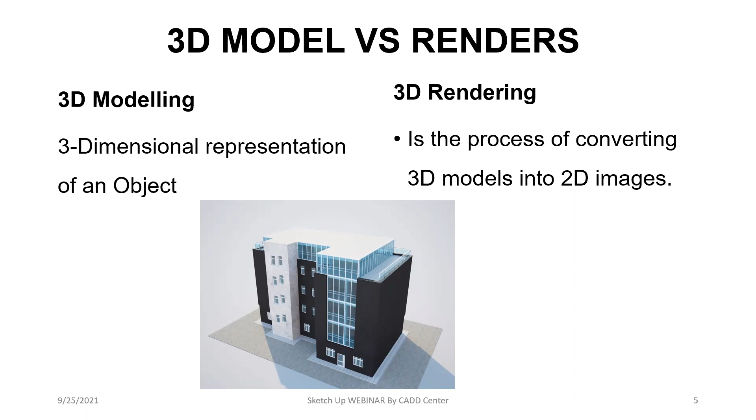That's why here I didn't put 3D model then 3D render separately, because even if I put a 3D model, it would become a photo, so it would be a render, unless I've taken a screenshot. So that is the difference. Now we can move on.

So now we're looking at what SketchUp can produce. These are some examples. This webinar is mostly going to concentrate on architectural drawings, but SketchUp can also do mechanical, electrical, or any kind of product design, though the webinar focuses more on the architectural side.

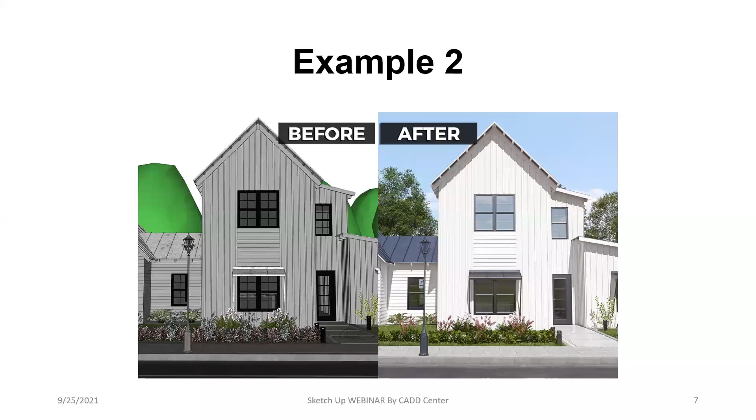Another example is this. We have before you render, you can see how the house is looking, then after rendering, this is how the final drawing looks. So that is the difference between the 3D model and the 3D rendering, or the 3D render. On the side, you can see it's more impressive, like a photo.

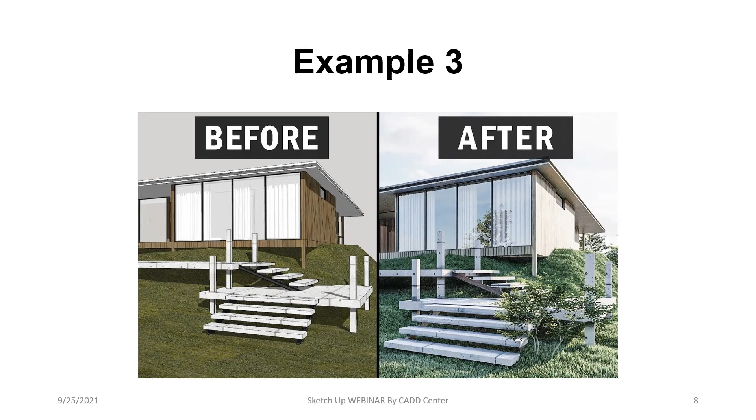Okay, so now we're going to look at how do you get SketchUp. There are different products, or versions, of SketchUp.

One, there's a free version, and it's only accessible through a web browser. All you need to do is visit the SketchUp Pro website, sign up if you don't have an account, or sign in, then you can start using SketchUp from there, through a web browser like Google Chrome, Edge, Safari, any browser. That one you don't need to pay for, but it has limited features. They're enough for a beginner, or enough for learning, so you don't need to spend a lot of money on software you're not commercially using.

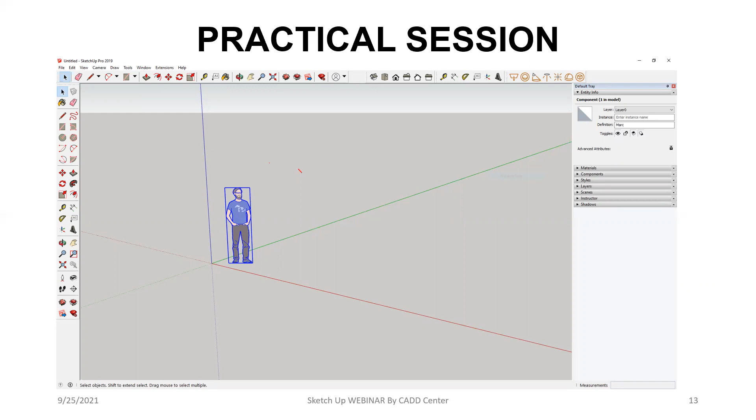Maybe you have any question about the presentation, from what I've presented before we go into a practical session? Anyone with a question? Okay, if there is no question, you can always send it in the chat. If there is no question, we can continue with our practical demonstration.

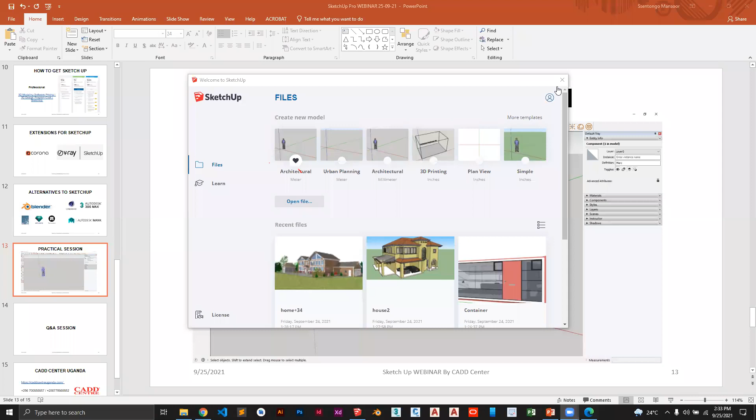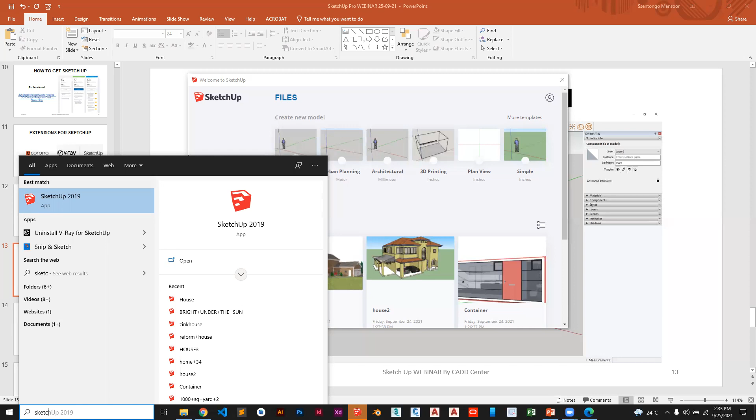So I've opened SketchUp, it's already installed on my computer. Here you can see the icon down here, that is its logo. You can either click on that in case you pinned it, or you can search for it. It is called SketchUp, I have version 2019. There are recent versions, but I'm using 2019 due to certain reasons, that the new versions tend to have problems and they tend to crash.

So every time you open it, it will give you this interface, and it has what they call templates. So when we're creating something, any drawing that we need to do in SketchUp, it starts with a template. It's not that it comes with already something in there, but there are certain settings that are done already for you. When you go through, there is architectural, urban planning, 3D printing, plan view, simple, but then the recent files - these are recent files that I've worked on.

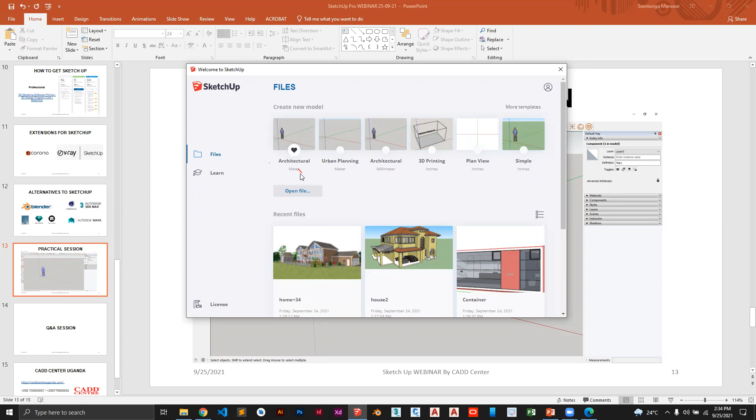Now, where you have to begin is the units here. So if it has architectural and meter, it means it's going to open for you a 3D space where you have X, Y, and Z, and the units will be in meters. Then urban planning will open according to urban planners - they have more dimensions compared to architecture, but the units will still be in meters.

Then it can also open architectural, but in millimeters. They can also do 3D printing, but that one in inches. Now, if you're going to create a 2-dimension, you need to start with a plan view template. So for me, I'm going to start with the architectural, and let me just go with meters.

Yeah, so we have SketchUp. Can you see the screen? Can you see the screen? Yes, we can. So the template will always just come with a certain model, like a person - this is just inbuilt, it comes with it.

As usual, you start by saving, you save your project, and SketchUp has an extension of .skp. So I'm going to save it here in desktop. Let me call it a practical demonstration.

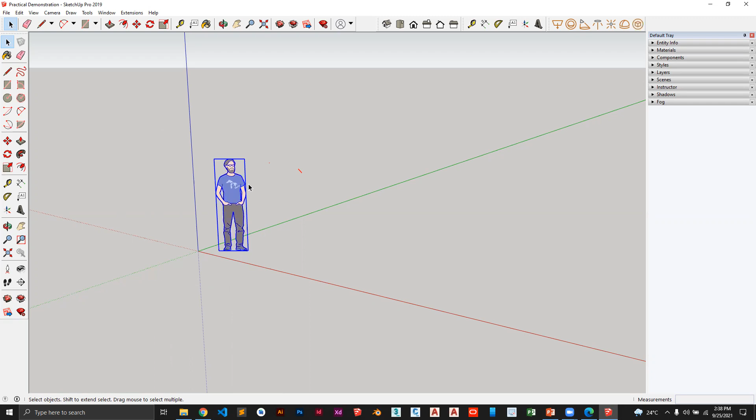So what I'm going to do, I'm going to select this and delete it. If you've used 3D modeling softwares or any construction drawing softwares, you know that when you left click on a mouse, then hold and move it, it can select something you want. Then after this, I can just press delete on my computer - that is deleted because we don't need it. So now you can see that we have the X, then Y, then the one up is Z.

So there are different viewing angles. I can come here to camera. Take SketchUp like maybe you're a photographer and you need to model something. The first thing you need to do is first take a photo, so even SketchUp is like that. Now take your mouse as maybe the camera. You're going to realize that you use your mouse to draw what you need, then go on and edit it later. So every time you see camera, it's like as you're making the drawing, how do you want to look at it? There are different viewing angles in SketchUp, and that's where I find from camera.

So if I say parallel projection, now everything it's going to draw. If you've done some construction drawing, there's a difference between parallel projection and perspective. Just that here we've not drawn anything yet. We're going to draw and you'll see the difference. Those are switched from here, from camera, and then you can see different things.

So we're going to go through the tools quickly. Then after we just model something small, we'll open the models that have already been created, because creating them takes some time, which we may not be having right now, but you'll be able to understand what SketchUp Pro can do for you.

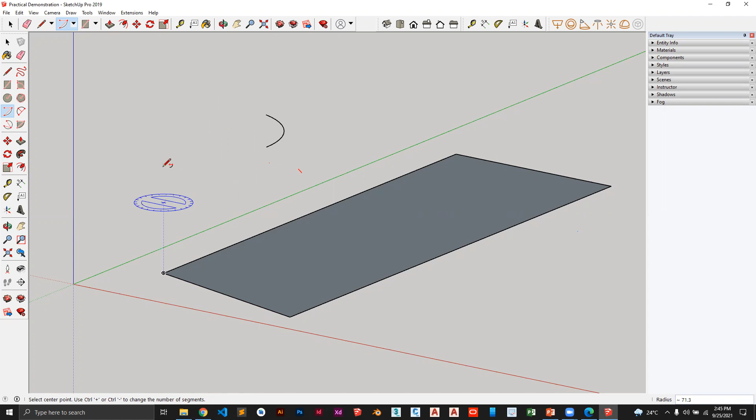So that is a line tool. Then now we have our arcs. These ones are also very important when you're doing complex architectural drawings, like some balconies or cladding. So that's where you can utilize arcs a lot. All you need to do is go and select that I need to draw an arc. This one needs 3 points, like that, good enough. As you're drawing, you can be guided with this, it's the one that guides you as you're drawing an arc. So that is the arcs tool.

Like I said, we cannot go through everything. If you enroll into the course, here I'm just going to demonstrate to you very few things.

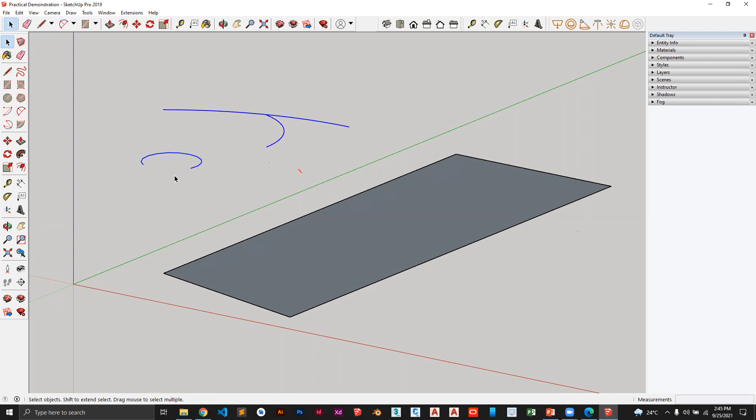Then we have shapes, like instead of drawing a line, you may want to draw a rectangle directly. So you can just come here, select rectangle, then you draw that line. But you have to be keen about this, you see we have 3 axes. If you see it in blue, it means that the rectangle has been drawn within the z-axis, like here. Then if I get it and draw it and start moving down, it's mostly where you draw like here. Like that, so they are drawn in the z-axis, going upwards towards the z-axis, like that. So you have to be very keen about the axis when drawing this.

There are more tricks on how to go about it, like dynamic X, Y, Z, UCS code, but we can't go into detail right now. So that is drawing with already the shapes.

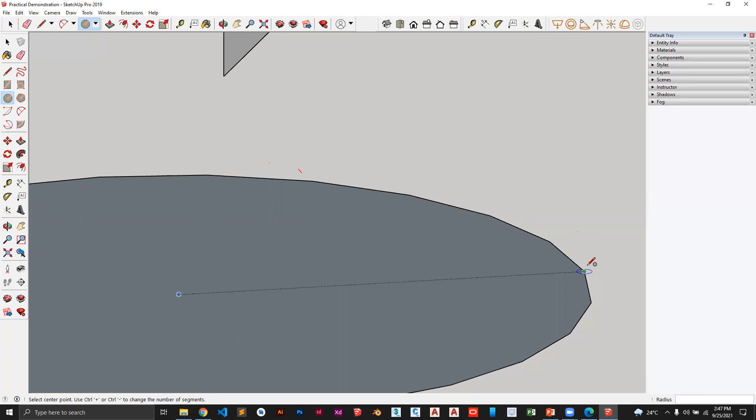Now, like a circle, something I would like to tell you about the circle. There is no software that can draw a perfect circle. What I'm trying to tell you is that a circle is not as curved as you think, it's just lines, but with points that are very close to each other. So you can see when I zoom like that, it looks like a circle, but when I zoom in closer, you see it's like a polygon. All circles are polygons, just made into very many polygons that can make a circle look smooth. When you have very many polygons, that's when you get a smooth circle. So that is a circle.

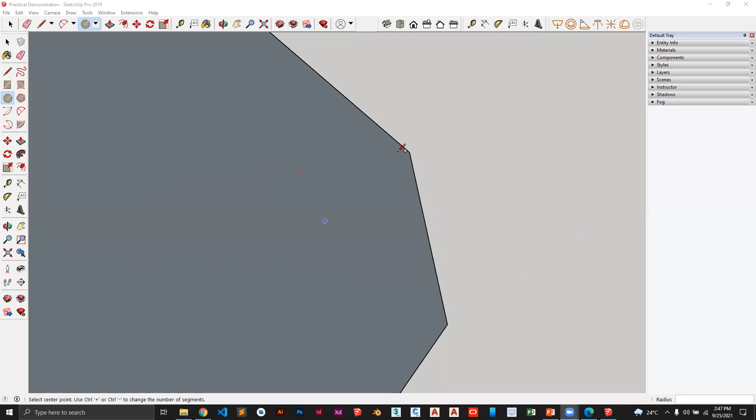Let's continue with more. When you're drawing a real polygon, as you're drawing this, down here there is what they call a command line. For example, if I'm drawing a circle, you can see that it gives me an option to type in the radius. So if I already know the radius of the circle, I can just click here, then type that I need a circle of radius 15 meters and press enter, then it will be able to draw it.

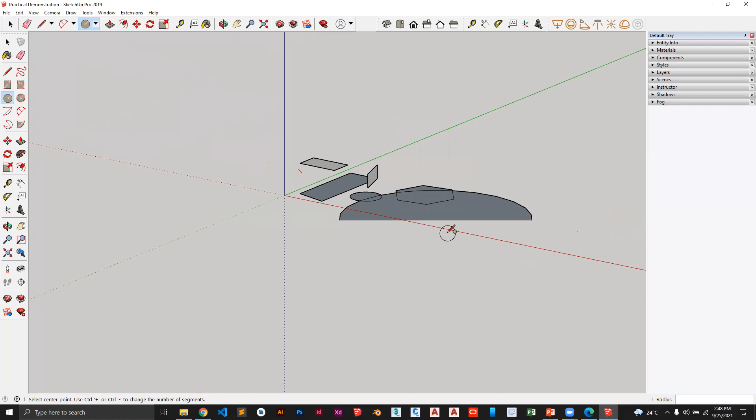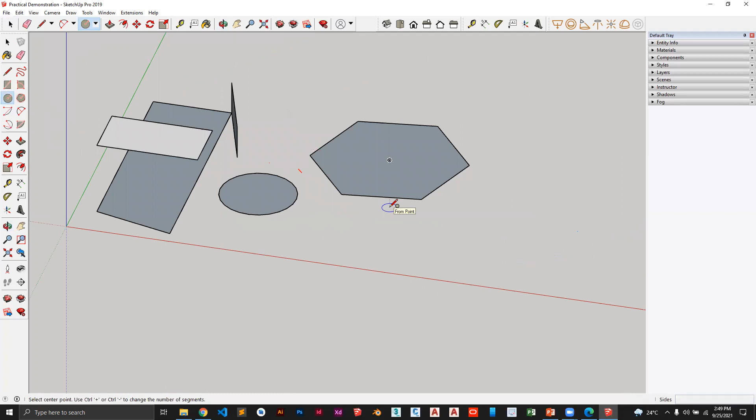Then another thing, as you're drawing, you may want to move around the way I'm doing this, for certain reasons, maybe you want to get closer to a certain object. That is called orbiting. You press the scrolling button, press it, then start moving. Or you can come and get this orbit, then when you get it, you can orbit around. Once you mess up with anything, you can just come back to camera, change it to perspective, then change it back to parallel projection, in case you've messed up with everything and want to get back to normal.

So that's how you can draw different shapes. Now there are commands, for rectangle you can just press R and start drawing, for circle you can just press C and start drawing.

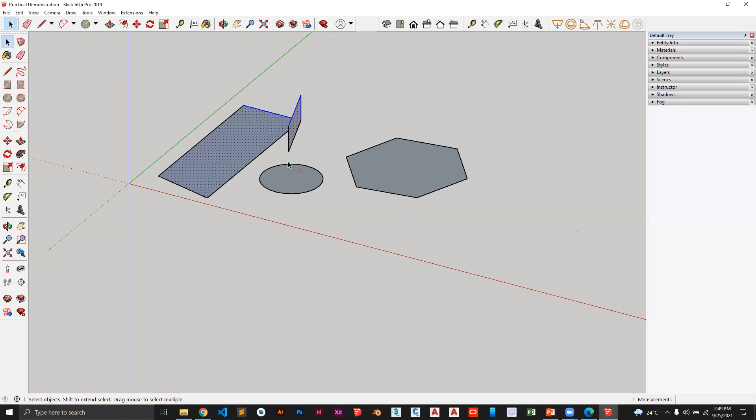Now let me first remove some of the drawings. So the ones I've already covered are mostly drawing tools, they are mostly used to draw. But right now we're going to look at those ones that are used to modify.

Okay, let me stay with this. So these ones are used to draw, the first ones. Now there are those that are used to modify.

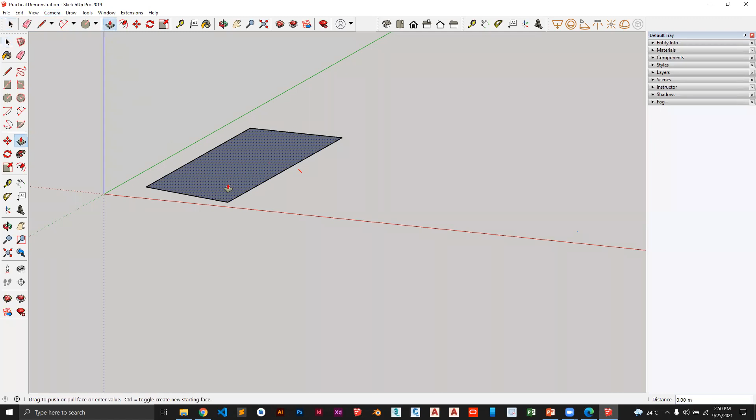The first one we're going to look at is called push-pull. When you click on it, it pulls the face like that. Yeah, that's how it works.

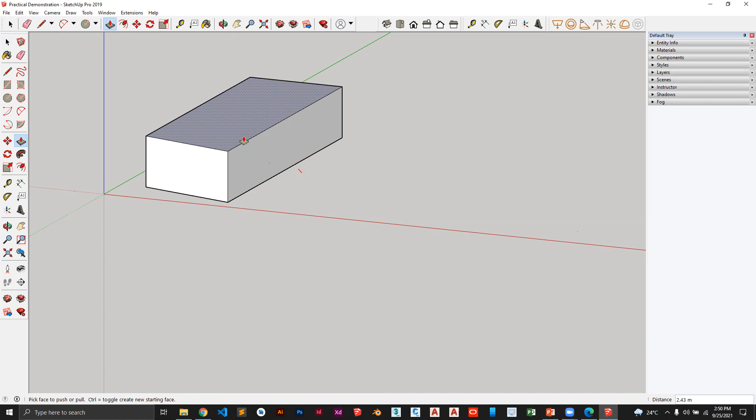Most drawings are drawn by starting with this 3D rectangle. You'll see that even buildings, most of the time, start from this. The push-pull command is also like the line drawing tool, used most of the time when you're creating. Then push-pull is the most used command when it comes to modifications. You'll have to use it a lot more.

After push-pull, we have offset. Like in AutoCAD, or even if you've never used AutoCAD, offset is like: I have a line, then I need another similar line, but at a certain distance from the existing one. So I can offset this face inside. That's how they call offset. You can offset the whole face, or you can just offset part of it.

For example, maybe I have a line. I've drawn this line, and I can offset it. First select it and click offset. Then you type in the distance that you need to offset it away from that.

But most of the time, the offset command is used on faces in SketchUp. That's why, when I click here, this is highlighted as a face. When I click here, this is also a face. These modification tools work mostly on faces.

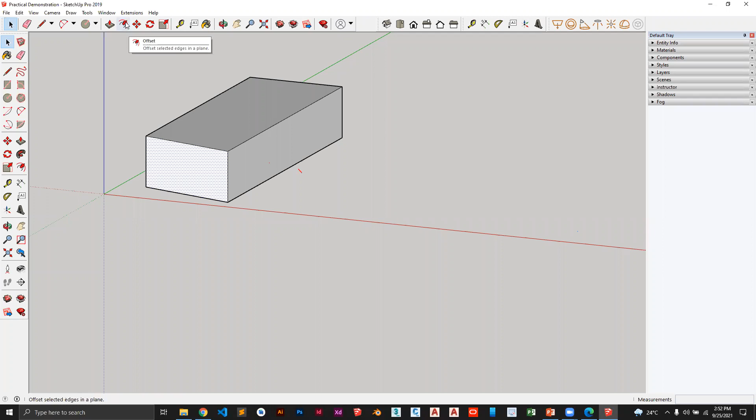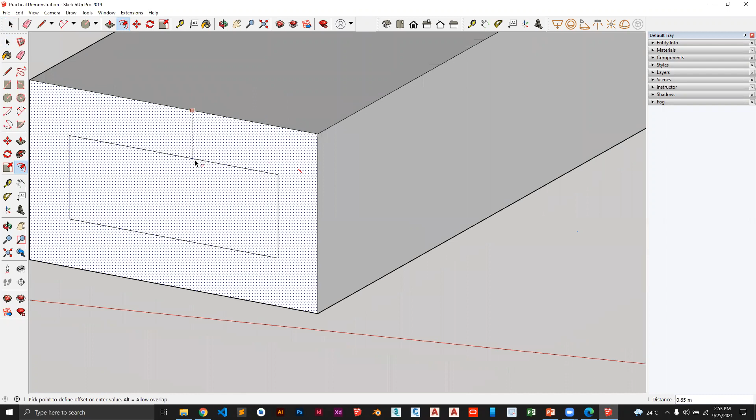When you come to offset, and I select offset from the edge, I can offset inside by either typing in the distance. That small dotted line is what they call the offset distance. So you can either just move it, or type it in from here, say 1 meter, and press enter. Then if you try to measure here, it will be 1 meter.

How do you do measuring? There is a tape measure tool inside. Just click on the start, then at the end. You can see that it is 1 meter, which is what I typed in as the offset distance.

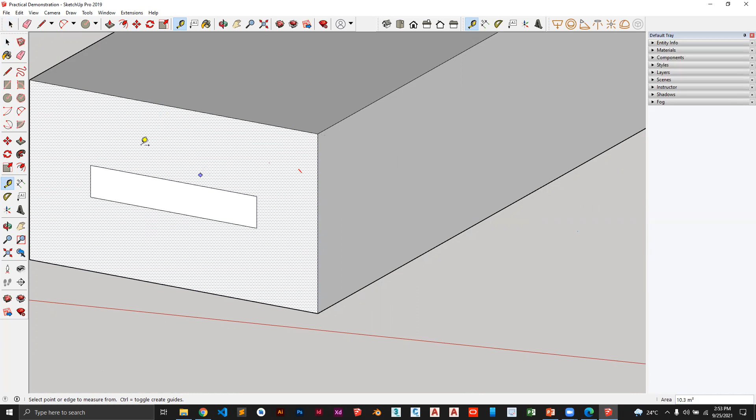So those are some of the modification tools. Then we have move, which selects an object and starts moving it. You use it by first selecting. When selecting, you have to be very keen. Now I've selected everything, but I've left out this one, so you have to be keen as you do the selection, so that this rectangle covers everything here.

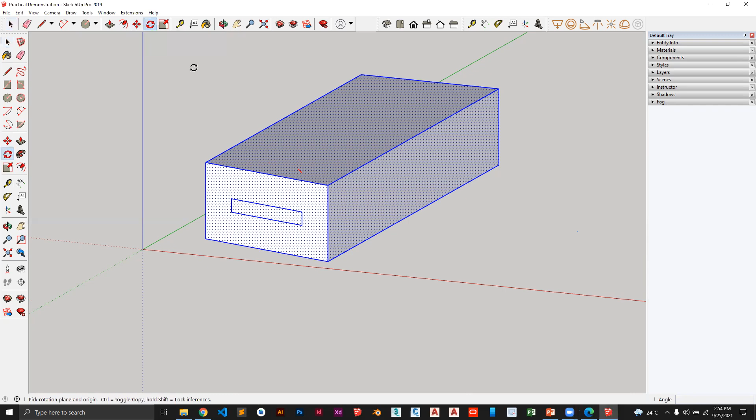Let's continue with a few more tools, then I'll show you at the end what you produce. Then we have rotate, which rotates an object from a certain angle.

Here, I'm rotating it around, and that is the rotate tool. Then we have scale. For scale, it will either increase or reduce an object according to the factor that you're giving it.

You can either do it manually or type in the factor. If you type a factor less than 1, it will be reduced in size by that percentage. If you type a factor greater than 1, it will be increased in size.

So those are most of the drawing tools and modification tools. Now you might wonder, having only shown you these tools, how can you come up with a very beautiful drawing or house using just these lines? Yeah, it is possible and it is being done.

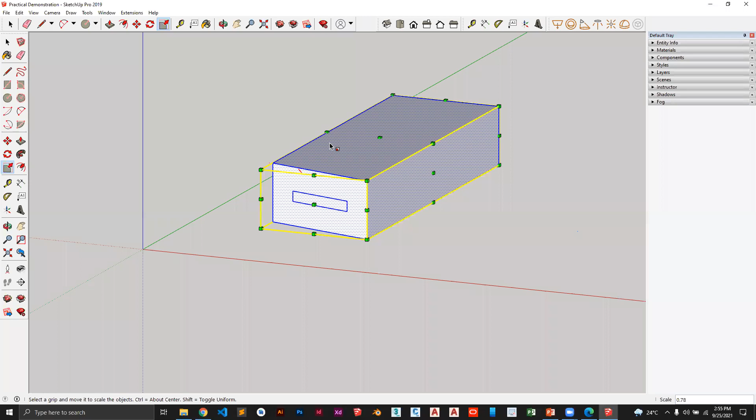We're going to create a very simple model, just the walls, to show you it is possible with SketchUp Pro. What we're going to do is use a rectangle tool. So I'm going to come here, select the rectangle tool, then draw a rectangle.

I can type in the dimensions. How do I type in the dimensions? Let me first change this — let me draw the parallel projection. I can use shift to move it closer. So I'm going to draw it around here.

Okay, now we get the rectangle tool. I press just the first point, then as I move, I need to type in the length and the width.

If I already know it, maybe the house is, let's just do one room, but when it is a big room, like 6 meters by 8, you can come here and type like 8 meters, 6, like that. Even if you don't include meters, because you already know that you're using meters.

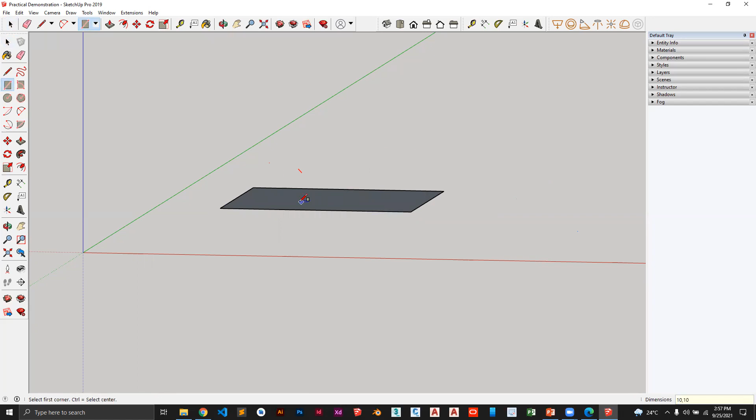So you can zoom in for it to be very close, or let's just try to use dimensions. Let me increase the dimensions. Okay, let me just draw this. Okay, 10 by 10. Let me just do that, just for demonstration.

So now we have that. We're going to use the push-pull, and we pull this up, then we can type in the height. Maybe it is 3 meters only. So it's not yet a house. Yes, I can see that.

Now we need to create a door. So for that door, okay, before you create a door, let's first create the walls. Now there are two ways of creating the walls. Either you can create two 3D objects and delete the inner part, or you can draw, then offset by the thickness of the wall, then push-pull. So let's use that one. I'm going to go back.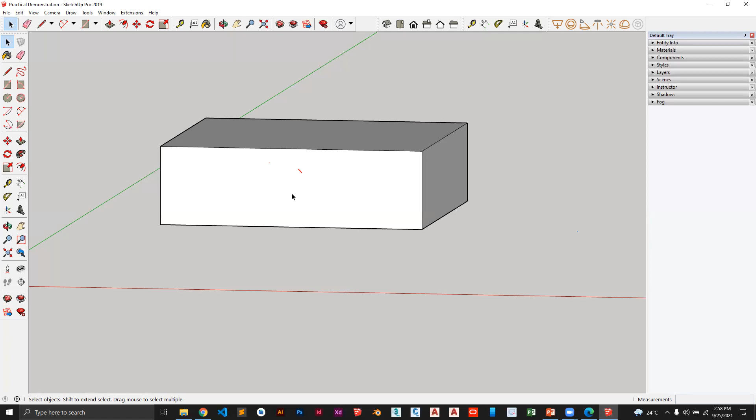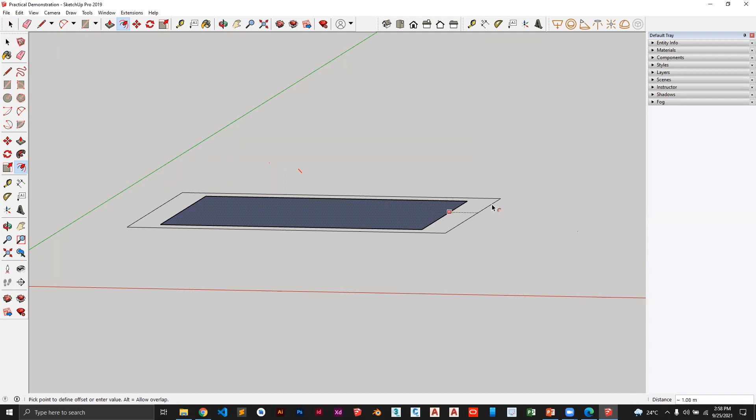I come to the offset tool here, then I'm going to offset, but I'm offsetting outside. I need to select this, then I'm offsetting outside by what? The thickness of the wall is 230 millimeters, that is 0.23, so I'm going to type in 0.23. Yeah, so I have this.

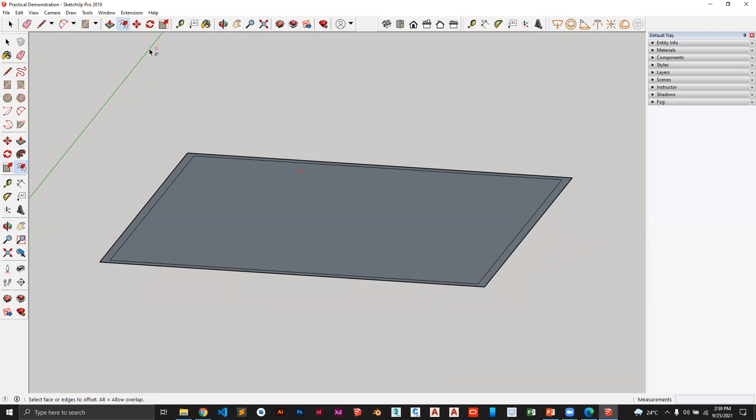Yes, now I can use the push pull command. Now you may see that this side looks big, no, it's because of the camera. When I try to move it around, it is of the same thickness. So now I'm going to use the push pull command, raise it by how many meters? Let me put 3.5. Yeah, so now we have this.

Yes, it is a sketchy house, but this is just for the beginning, that's what you need to start with. You can see when I orbit around, yeah, it's hollow. So those are my walls. Now I need to create

doors. And how? With those, I need to create like a rectangle, but on a certain dimension. So most of the doors, like a single one, is 2.1 meter by 0.9. So that is the one I'm going to create.

So either I can first draw a line on a certain length so that I mark where the starting point is going to be, but rather, due to the interest of time, let's just draw it. We're not going to be so accurate to that. But know that in case you have dimensions already in your head, those are the ones that you should use.

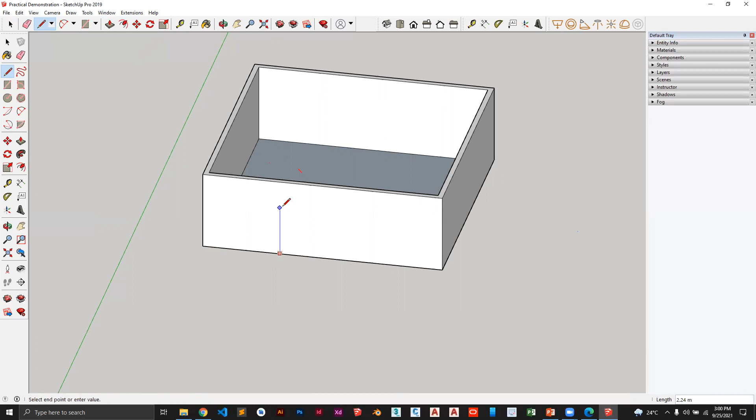So I'm going to draw a line going up by 2.1, yes, then I go this side by 0.9, then I go down by 2.1. Yeah, and then I can cross it, or I can leave it. Then when you're done, you press escape.

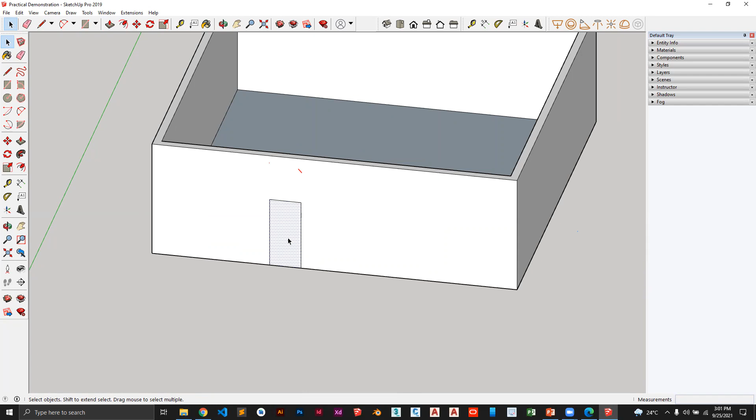So how do you now make this hollow? You can see when I select this, this is the face now. So I'm going to push pull it, but inside, so that it creates a hole in between for the frame of that door.

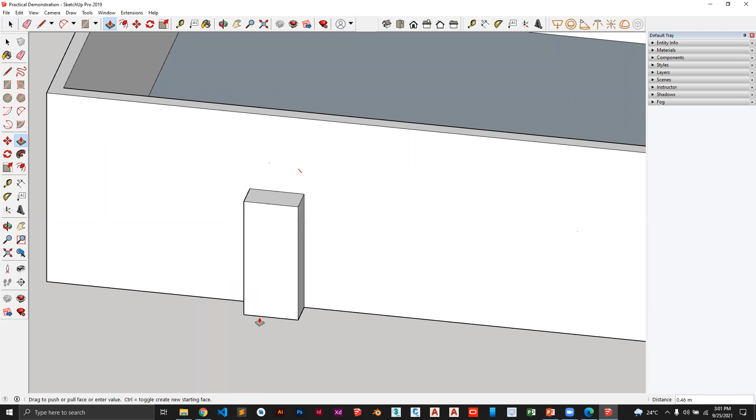So I push pull this, then I move it inside until you see that it will give you an on face, just that now this one is small, or until you see that light, because it is the same as inner light. But when you bring it outside, it should be extruding, but when you take it inside, because there is already something existing, it will create a hole. So either I can just click there, or I can click to what extent.

So I'll click on the back wall, because I need to pull it until it reaches this. Now when I pan around, you can see I've created a hole for that door.

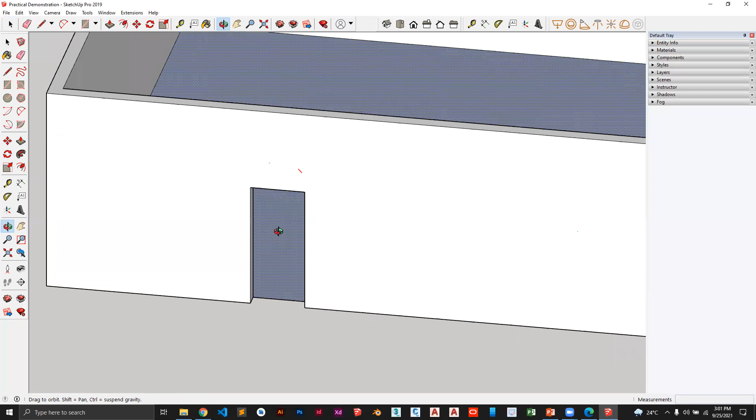Then we're just going to create a hole for the window. After that, maybe we'll also try a roof. Let me show you already models that have been created. So now I need to create a window.

We know that windows are also raised to a certain height. Most of the time they are level with the top of the door, like this. That's where the windows usually are. They also have different dimensions accordingly, so maybe I'll just use 2 by 2. It depends on the window you have, but there are standard sizes for windows.

With this, you can use the tape measure tool to create what they call a guide. Just click down, then press Ctrl to ensure that plus symbol is on the edge. Press here, press Ctrl, then go up to 2.1. So there it has created a guide, so that when I'm creating my window, it's going to be on the same level as the door.

With this, you can draw a window by typing in your own size, but now I'm just going to click. Once I'm done, you can get the eraser tool and erase that guide. Then we have this face, and what's next is the push/pull tool.

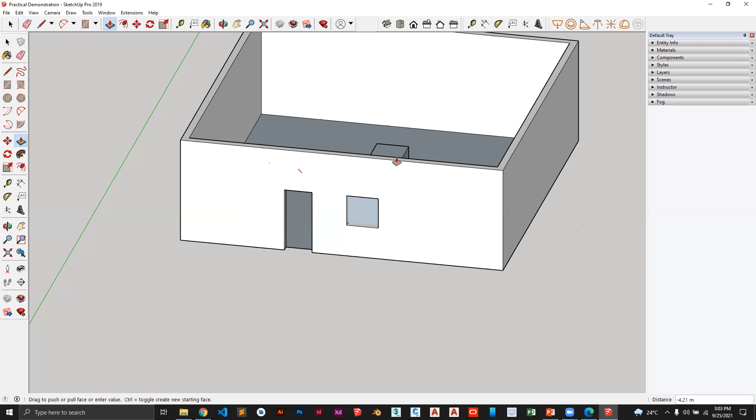Let's pull it inside. Now push/pull this up to click here, so that it doesn't extrude to the other side. Now we have a door and window opening. Then you might be wondering, how do you create a roof?

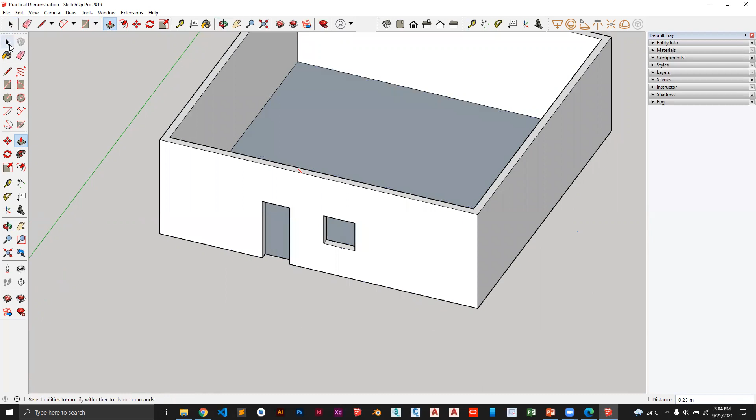Everything is done with the line tool. You can use the line tool like here, draw something on a certain angle. You can start with this - maybe the middle point is here - and draw a line that goes a little bit up.

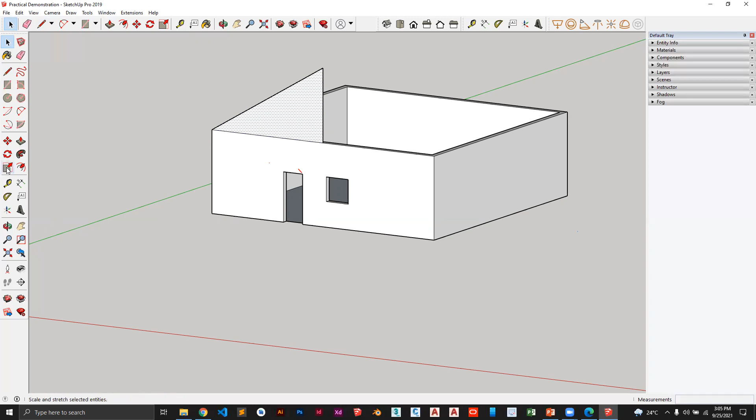So there you'll have dimensions already that can give you the pitch angle of the roof, and you'll already know the height of this. That's how you can create this. This is a face that you can extrude to the other side, so you can use push/pull. Or before that, you can first create this side too.

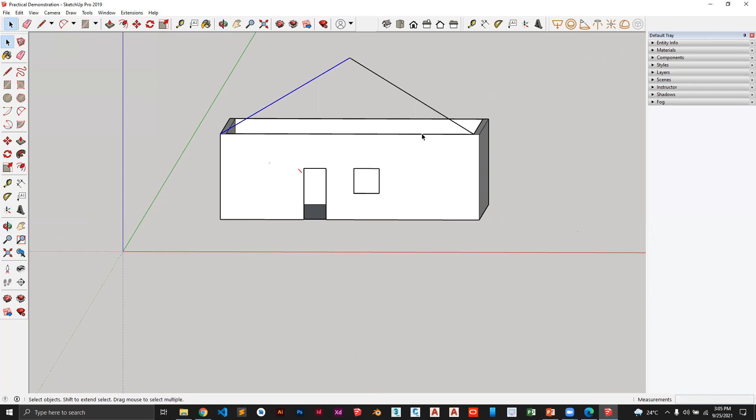Now we have two faces - this one and this one. You can even erase this one in the middle so that you now have one face. Here you have to be keen as you select. Okay, we forgot to draw the one below, so let's just use two faces to extrude.

Now I can select this and use Ctrl to select the second one, then use push/pull. I need to push/pull this.

You need to know the extent to which it's going to extrude. Now we're done with that. You can do the same thing to this - you just have to be keen when selecting the surface here. Let me first select it, then push/pull.

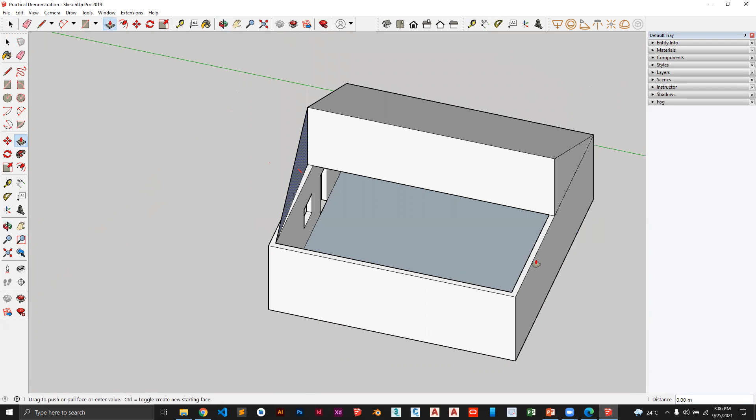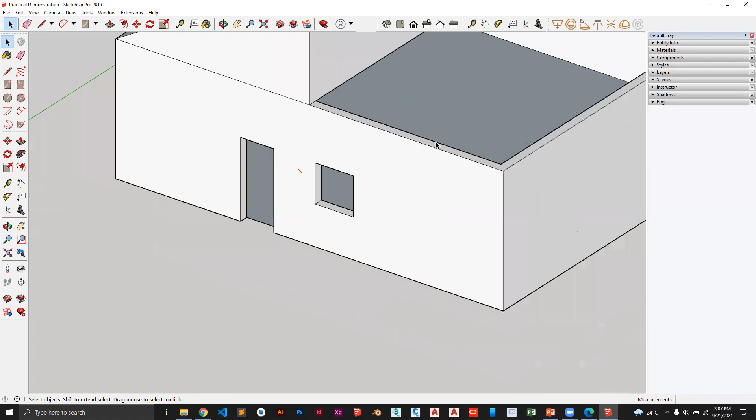You can continue more and more to model a house like this. So now we are just getting started, but you can already produce something. I know it's too sketchy, but this is how you start. Now I'm going to show you what it produces, where you can end up in case you concentrate on using SketchUp Pro.

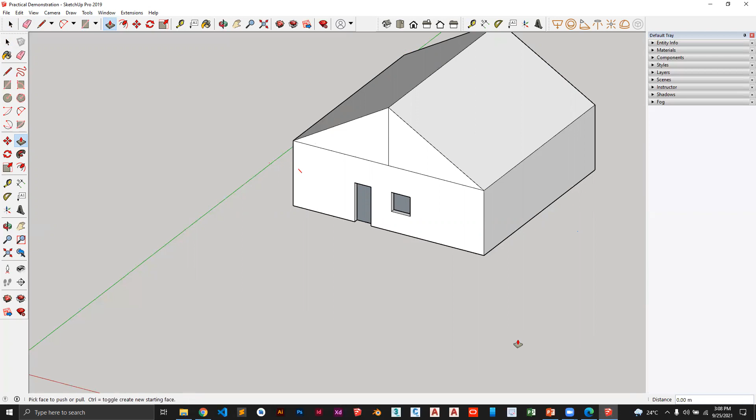There are some things we haven't gone through. There's what they call a default tray.

So the default tray will always have the entity information. Entity information is when you select something and click on this to give you information about what is selected. Let me just select one face, so it will give me the area and which layer it is on. In SketchUp Pro, you can use layers like in AutoCAD. So that is about entity information.

Now there's what they call materials. Materials are used, for example, if I want to apply materials to a certain wall, I need to apply certain materials there. So you come to materials, select the material you want to apply, then you just drag and drop it. So maybe these are bricks, you can drag and drop it here on the face.

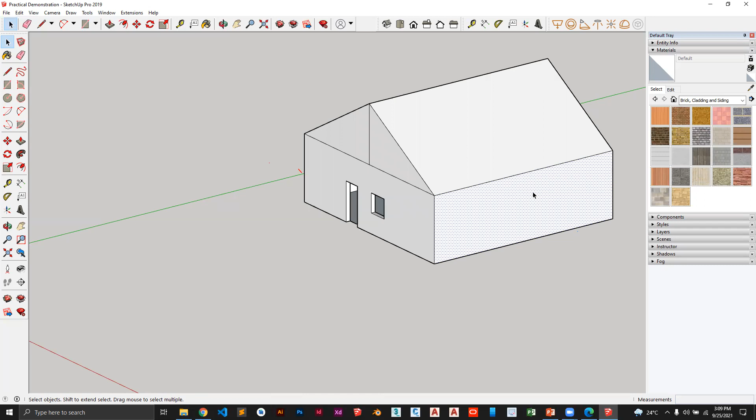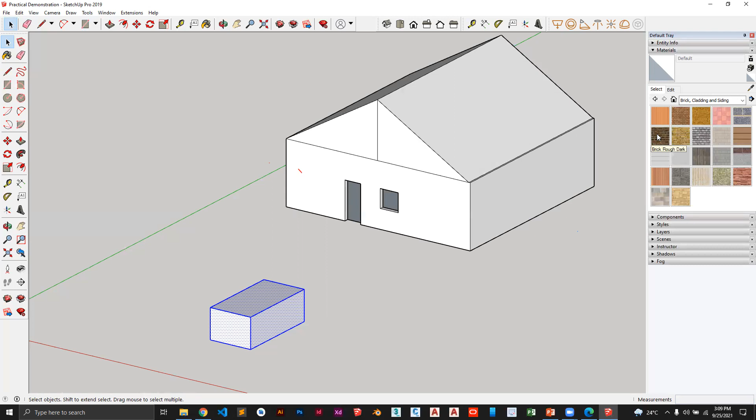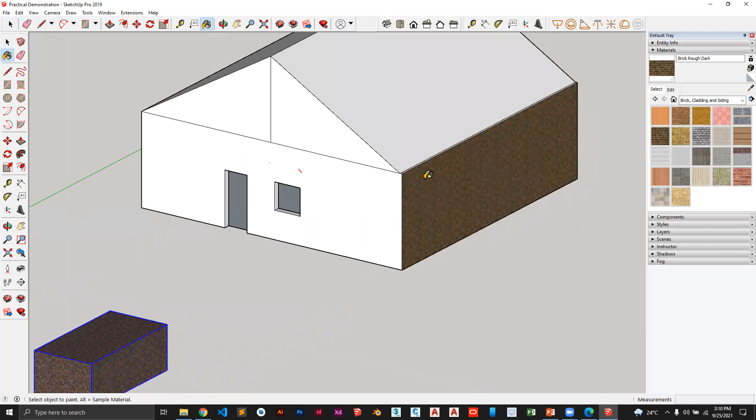Here it will need you to select kind of like a model, not only the face. Let me just draw a 3D box, and we apply some material to it. So you see that bricks are applied there. You just click on this, then you get this bucket thing. When you get it, just click on where you want to apply it. So you can see that bricks are applied. Now this is not perfect because we've not given it time, but that's how it will look like.

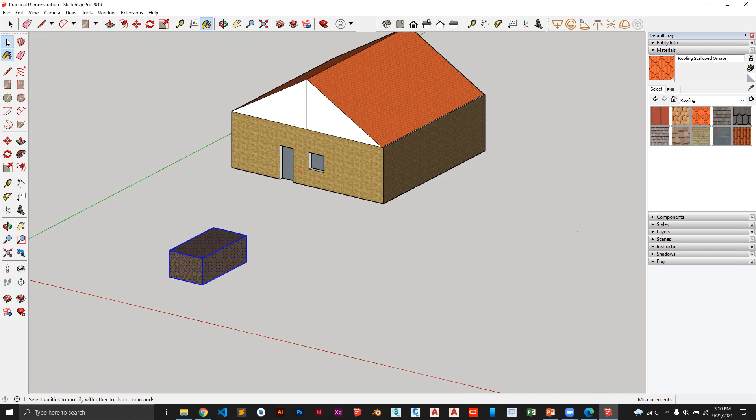So maybe here, now I need things for the roof. I come back here and say I need roofing, then I'm going to use tiles. You can even import images here. So you select, then apply it here. That's your roof, yeah, like that. So like I've told you, this is just to demonstrate to you. Due to limited time, we cannot perfect everything, but you can add different materials to the faces of your object.

So I can add another scene, this is called scene 2. When I come to scene 2, I can maybe change this to 2D, or make it face the other side. But when I go back to scene 1, it is still moved like here. So scenes are created to look at the object from different angles. Those are what they call scenes, a small hint about scenes.

And many more, you can add shadows to the ground. What it means for shadows is that as you're drawing, you can say I want to look at my house when it is morning. Because here we have time, then there's also date. You need to know the month because some months have rainy season. So you can say I want to look at it in the morning, then you also have to select which UTC time. The one for East Africa or Kampala is UTC plus 03.

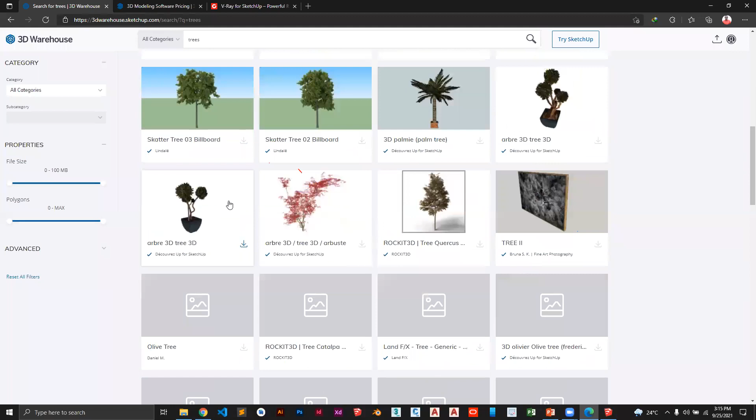Yeah, but that is 3D Warehouse. People that are using SketchUp Pro sit down and create things that can be copied and pasted, so we don't need to repeat ourselves with this. They create them, and you too can create and upload, so that they are spread out freely and you save on time as you are modeling.

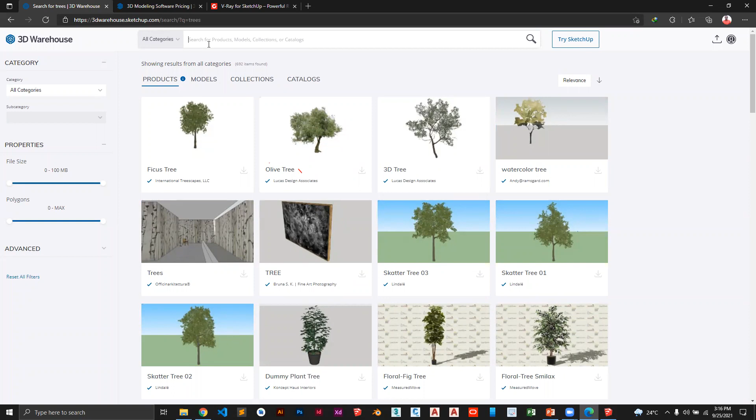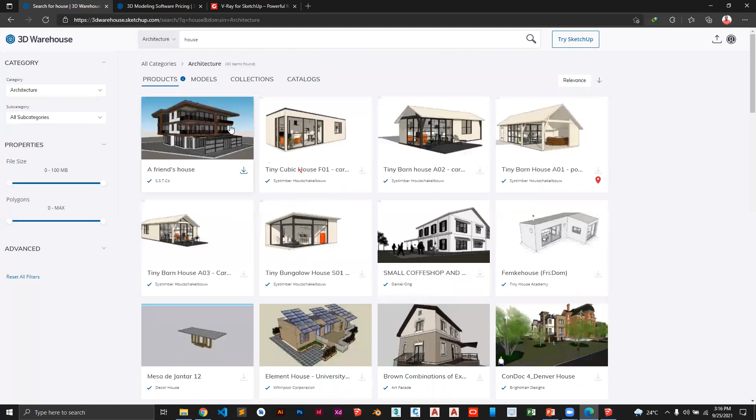Yeah, so even if I say house, I'll get different houses. Though there I need to be keen on which category, so I may say I need architecture, and I type in house. So that's why it's going to bring the houses. So that is called 3D Warehouse.

So let's go back to SketchUp. You access it from this button. Now there is also the 3D Extension Warehouse. This one gets extensions. There are extensions that only do shadows, extensions that help you do certain specific things. So that's where you go to the 3D Extension Warehouse.

Yeah, so we have very many more things, setting up lights, doing what. But we can't go into them in detail here, unless you've enrolled into the course, that's when you'll be able to understand more.

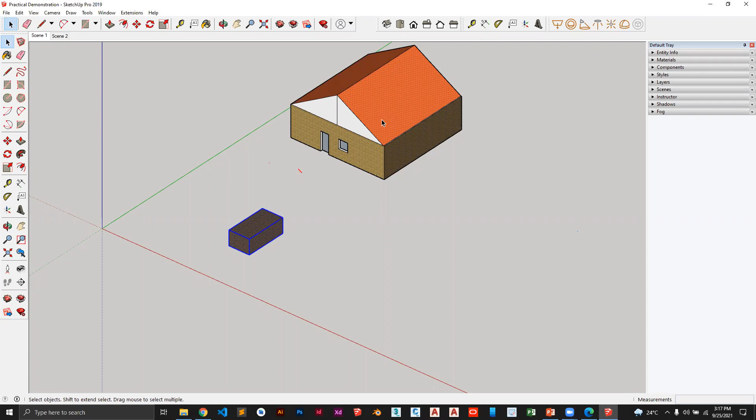So right now, I'm going to open some 3D models that have already been created in SketchUp Pro. Then we try to do rendering and you compare. And I'm also going to show you V-Ray, how do you use V-Ray. Just sitting a little bit about it, then we shall go into it.

Yeah, so now I'm going to open, let me first open the first model. So if you draw something, maybe a very big house, it depends on how powerful your computer is in order for you to do these models or renders.

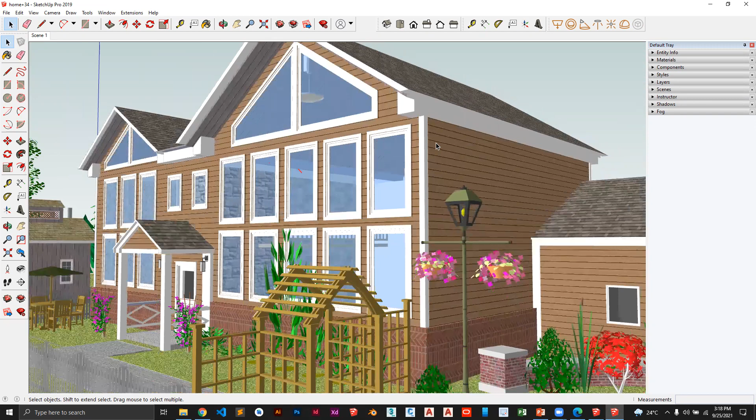So you see this, it kind of looks like it is hard to do, but according to what I've already shown you, these are just lines and materials that have been applied onto the different surfaces. So you too can create this. It's not hard to create.

Yeah, the trees and what they were, they were just brought in. You can see that they are separate objects which can be moved to another destination. Now this is a 3D model. So how do you get a 3D render, like that nice looking photo that most people show?

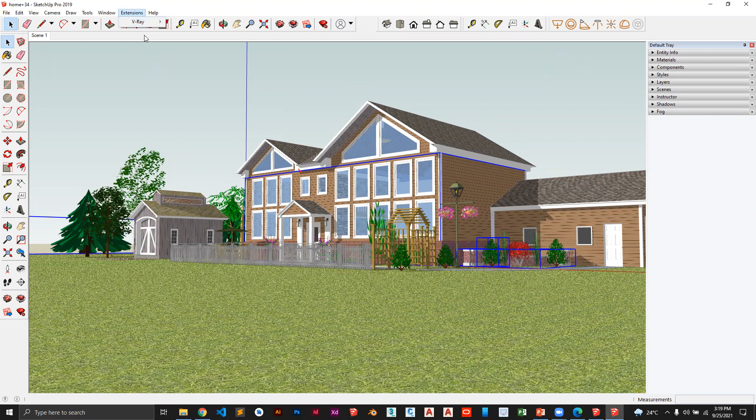Yes, this is how you get it. You need an extension that does so, and in this case we are using V-Ray. You have to first install it on the computer, so mine is already installed. When I come to the extensions tab, I can see that I have V-Ray, meaning I can have more extensions, but I'm only using V-Ray. Then it has different parts: there's asset editor, V-Ray rendering, V-Ray lights, V-Ray objects, very many of them.

Before we go to V-Ray, can you see this? It's showing sun from a certain direction hitting on this. So when you go to shadows and change to a different day, to a different time of that day, are you seeing the lights changing, everything changing? Yes, we can see it. So that's how we use shadows. I didn't demonstrate it before because the other one couldn't show very well.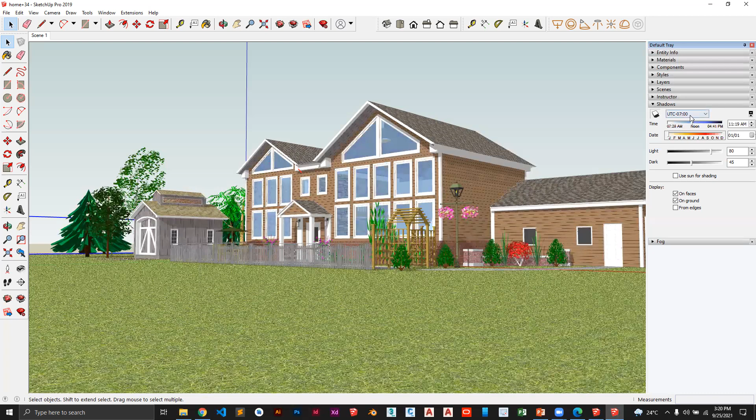Even when you change a month, it will know that in January, in East Africa... now here we have to first change to East Africa back. Yeah, that one. Then you change to a different month and also a different time.

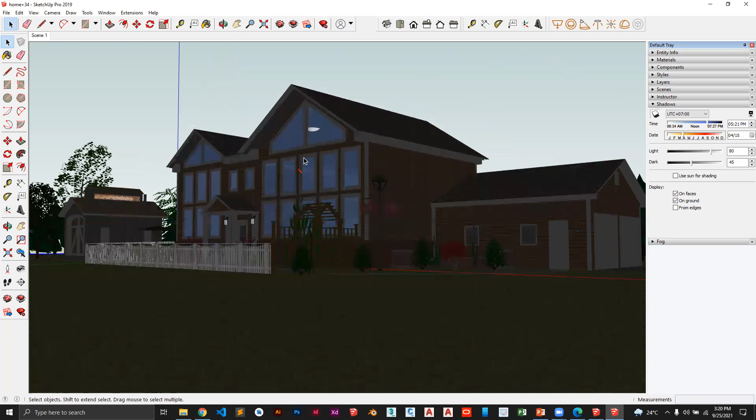Okay, I think it's just still loading. Okay, these are kind of heavy, the objects are a little bit heavy, so you have to be keen with the computer you're using. Let me load another one that we're going to use. Okay, let me first close this. Load it.

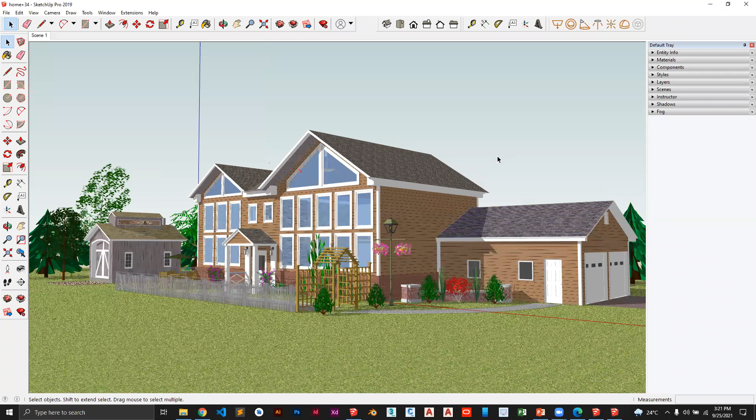All right, so now we're going to do rendering for this, and we see how it comes up. Now, when I'm zooming in, it kind of gets black, then it gets back. Why? Because it's heavy on the computer processes, and right now I'm opening very many applications. We are live streaming. That's why I was saying even SketchUp Pro doesn't require a very strong machine, but the other softwares require a very strong computer in order for you to use them.

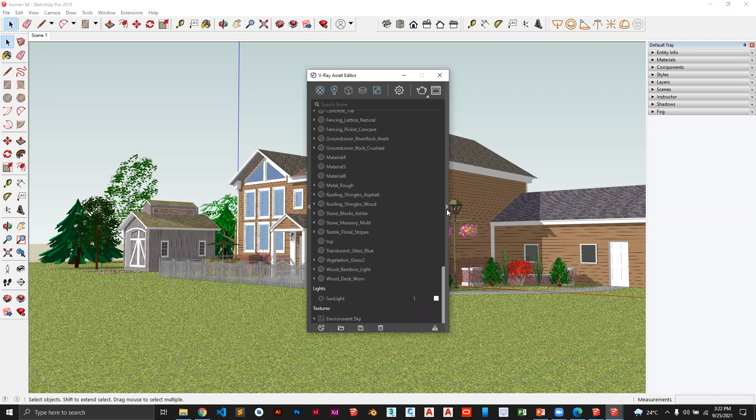So I'm going to go to extensions, V-Ray, then I go to asset editor. Asset editor is where I get different settings that dictate how I should make a render, because we already have a 3D, but now we need to produce a 2D image that is looking very impressive. So this is the asset editor, it has different settings. We're not going to go so much into them in this limited time, but these are materials.

Then down here we have lights. You can set lights, which color of lights do you want to have. You can also have lights separately here. Then this is about planes, how do you want them to look like. This is about layers, but I'm mostly interested in settings.

So here you need to select, is it going to render using a CPU or GPU? It depends on the computer, whether it has a graphics processing unit. If you put it to GPU, most times it will take a shorter period of time because the graphics processing unit is more powerful than the CPU for this kind of work. Then you can select the quality, whether you want medium, high, or very high. When you say very high, it's going to look very nice but take too long. Sometimes renders can even take 1 hour, 2 hours, 6 hours, sometimes the whole night, depending on what you render and how powerful your computer is.

So if you're just doing something faster to see how it looks, just use medium quality. Then when you feel like, yeah, this is what I want, when you're exporting to send to a client or to save for your own benefit, that's when you go with very high quality. Very high quality will be a photo that is very heavy but looks nice with very detailed results. Then we have more settings when it comes to camera, how do you want it to be. We're not going to go so much into that. The render output.

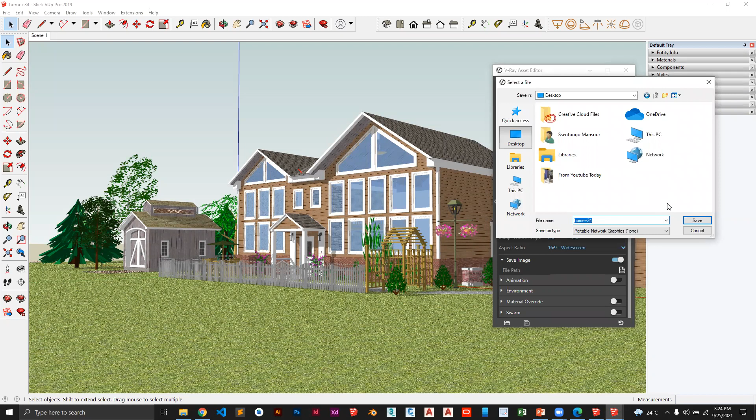By clicking on this, you select the path where the photo will be saved, and it will be saved as PNG or any other file type. I'm going to leave it as PNG. There are more tool settings that you can adjust.

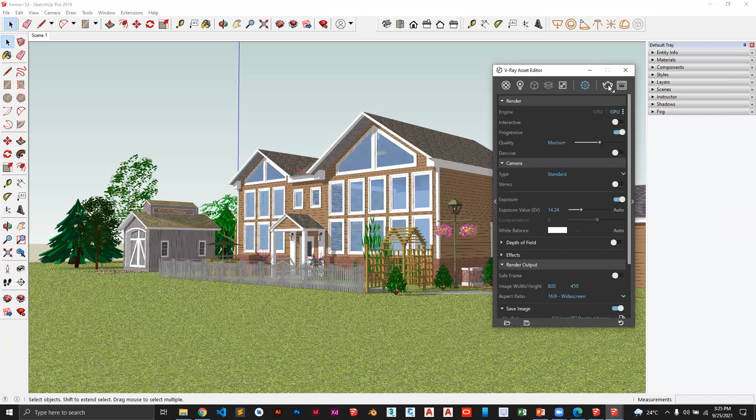After that, just click on this icon here, the render icon, and it will open what they call a V-Ray frame buffer. The V-Ray frame buffer is what shows the output of your render. You can see right now it's loading, which is a computer intensive process.

You can see that when you compare the output here, this one is looking better than what is here, but it's taking some time to recreate. When I zoom in, you can see that the pixels are covering up slowly, improving after some time.

So the time it takes for you to render, this is called rendering, and you can just click here to save that photo. Right now I'm running very many things, so the computer is bringing an error, it's a warning that it can compromise. The more time it takes, the better it looks. You can see like that. So that's how you create a render.

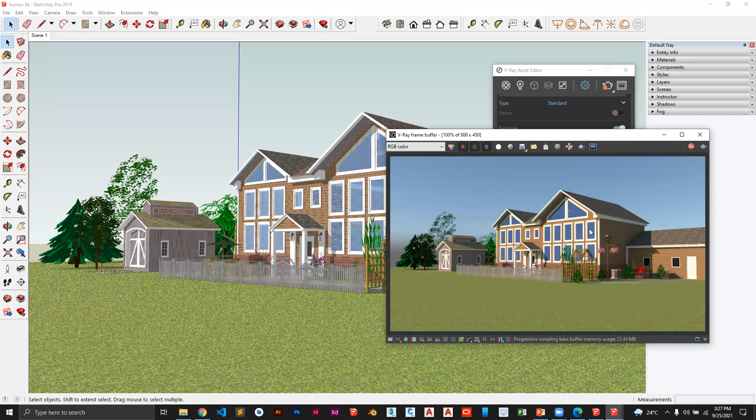So when you compare this to this, the rendered picture, okay. I'm going to stop rendering so that I don't consume a lot of resources, but that's how you render.

So let me first close this. We'll open just one more demonstration.

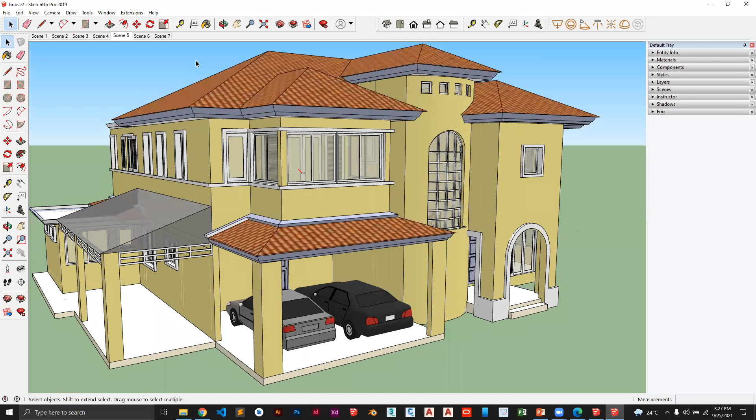SketchUp gives you the authority, the morale, to create anything you're thinking about. You can see this model has different scenes. Scene 1 looking at the front, then scene 2, and scene 3. Then there's another one where the roof was not there. That's how it looks like.

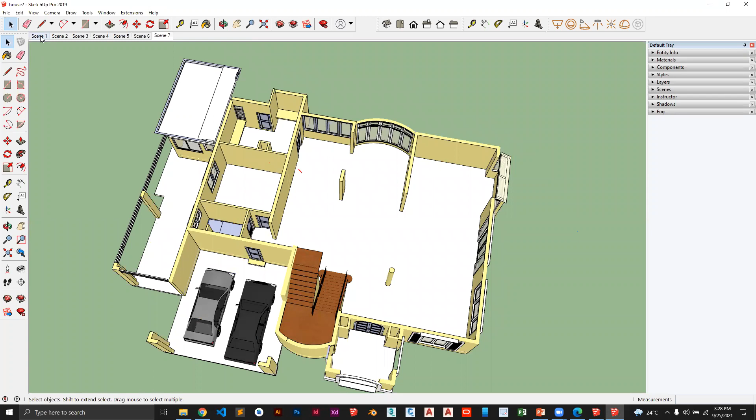Then there's this one. So I'm just going to render scene 1 and have a look at it. Let me look for one that is... okay, this I'm going to render as scene 2. So I go back to extension, V-Ray asset editor.

This time around I'm not going to do a lot of modifications, I'm just going to click on render with the default setting. Now here, when you're rendering, there are different options: rendering on the computer, rendering in the cloud, and export .vrscene file. Rendering on the computer uses the computer's resources.

Now if I render in the cloud, that is when you visit the pricing of SketchUp, they will show you the storage they give you with the cloud. You can use what's called Chaos Cloud, from the company that creates the V-Ray extension. There you pay money so that even if your computer is slow, you can just click on render. As long as you have a strong internet connection, it is rendered on the other servers of the cloud, then they send you the output. With that, you're not straining your computer's computational resources.

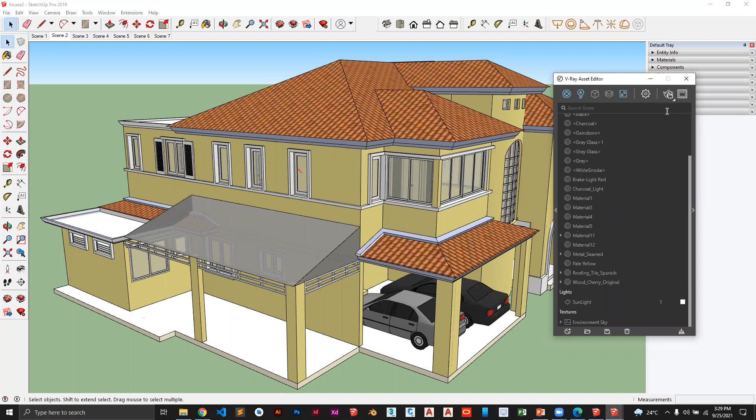But now I'm going to use my computer, so I click on that. It takes some time depending on how many applications you're running, how strong the computer is - the pixels of the photo build up slowly. It also depends because it's 800 by 450, so it can finish faster. If I put it to be like 1080 by 720, you already see that it's looking like SketchUp here.